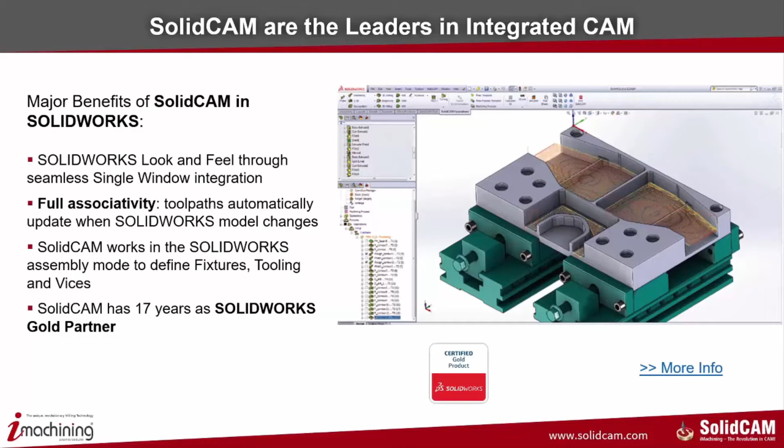We have a complete integrated solution inside SolidWorks. We are a modular system, so we can add the specific modules needed and when needed as well, so you don't have to have all the modules all at once. If you buy a new machine and need extra modules, these can be plugged in afterwards.

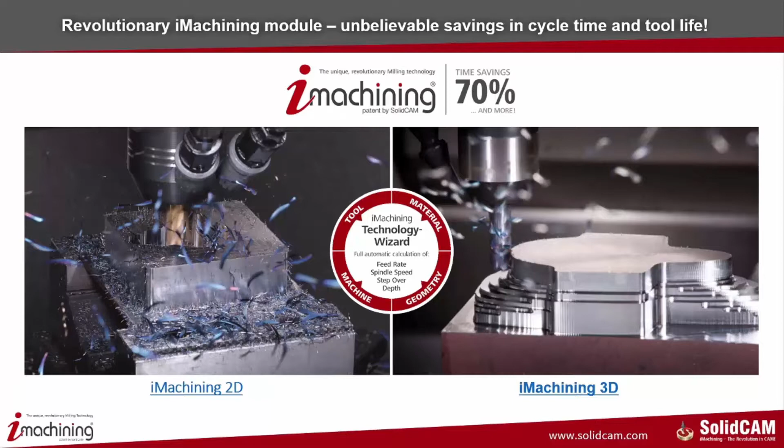Moving on to our iMachining module. So this is our high-speed roughing operation inside SolidCAM with a technology wizard built in as well. So we get increased productivity due to shorter cycle times, up to 70% and more cycle time saving. We dramatically increase the tool life and unmatched hard material machining as well.

We see outstanding performance when using small tools, and we can use iMachining on 4-axis machines, 5-axis machines, mill-turn machines as well. High programming productivity and a very short learning curve. The unique wizard will optimize the feeds and speeds for you, including the depth of cut based on the stock and the tool material, as well as the machine specifications. So this takes the headache out of programming these high-speed roughing operations.

So iMachining comes in 2 stages, all built into the same operation. The first stage of iMachining is to create an intelligent toolpath, so an efficient tangential toolpath which will ensure constant tool load on the machine. And then the second part of iMachining is the technology wizard. This will calculate the cutting conditions for any given machining operation.

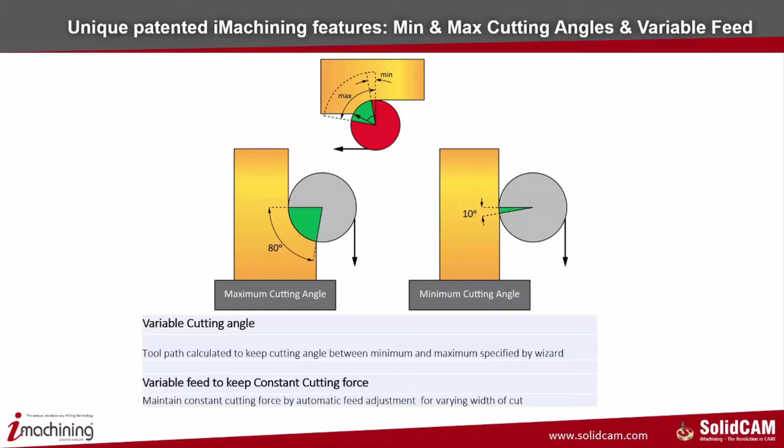So this will calculate things like the speed, the feed, the depth of cut, and also the cutting angles. So we can have variable cutting angles. You can see there from 80 degrees to 10 degrees we can set the maximum and minimum cutting angles based on what we wish to achieve, or we can let the wizard handle those maximum and minimum based on the material parameters that it's been given.

Also, the patented unique features inside iMachining are we have the morphing spirals only in iMachining, as you can see there on the left, so with a varying width of cut. And on the right hand side we have intelligent separation as well for iMachining, so we can separate areas with channels to maximize the spiral area.

You can see there on the left hand side we're machining up to a wall. Now once we're machining up against the wall we're going to be full engagement with the cutter. So what iMachining does is it separates this section out and machines in a sort of lace strategy here against the wall, and creates these 2 channels here to leave 3 final areas for spiraling.

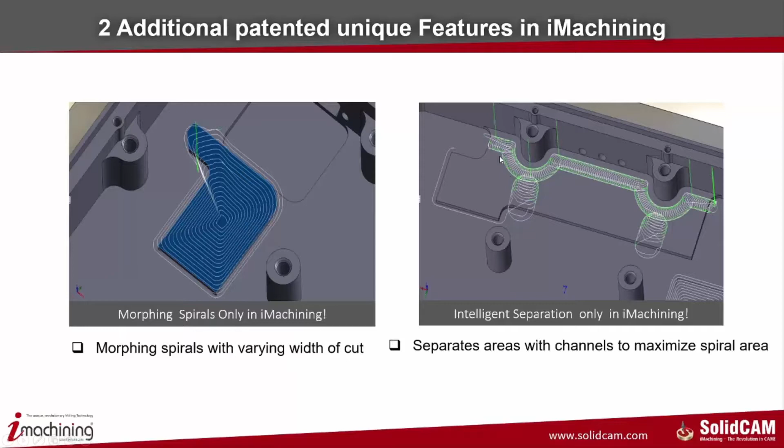So optimal speeds and feeds for iMachining. So the technology wizard will calculate these speeds and feeds for you based on data that we have initially entered. So we would enter the material properties. We obviously select the geometry that we want to machine. We have the tool geometries and we put in the machine parameters.

This will then calculate all of these that we see in red here. So the technology wizard will calculate the depth, the feed rate, the step over and the spindle speed, all synchronized together.

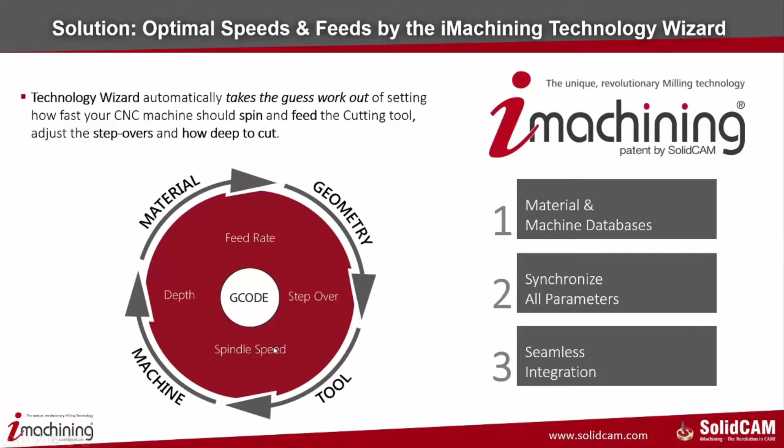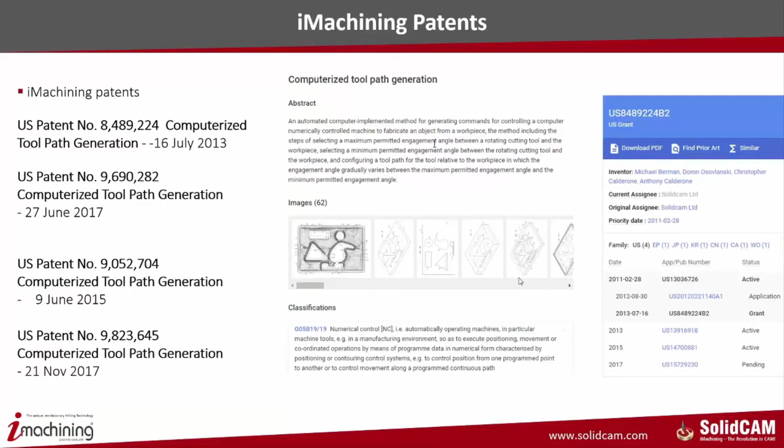And again iMachining will calculate this for us. iMachining is a patented technology. No other system can use our technology. You may see other systems using the spiral or morphing toolpaths, but you won't see any system using a spiral toolpath and also calculating the speeds and feeds and depths of cut using our technology.

So let's have a look at a demonstration of the component that we're actually cutting live on the machine today. So this is the component that we're cutting today live in our seminar. As you can see, we have two operations on this component.

So first of all, operation 1, we start with a blank billet of material, and we are holding this in the Schunk vise in the double pot system, and we're then going to use some iMachining to initially rough out all of this material here, and then we're doing some general machining and finishing on the inner shapes, and then chamfering around the top on operation 1.

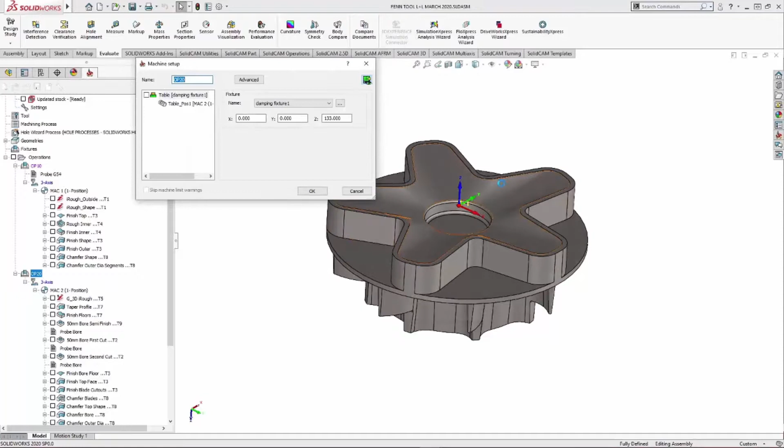Now, operation 2 is where we then turn the component over. We already have this shape machined, and we're now holding it again using the shunt double pot system, but now holding it in the diaphragm that has the shape cut into it. So this will hold the component down while we machine the second operation.

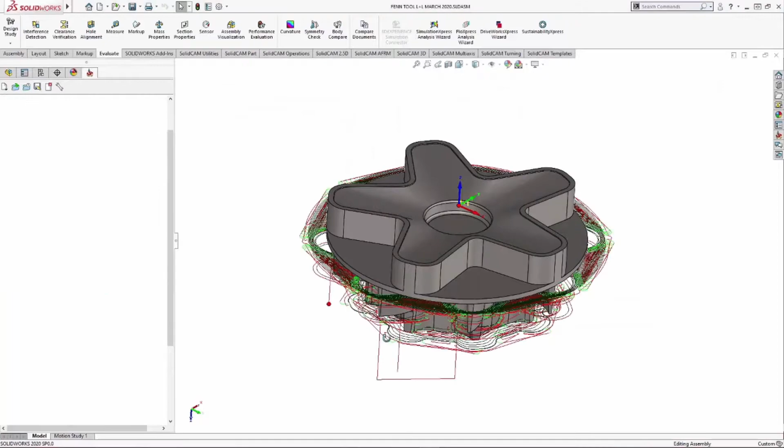So if you have a look at the iMachining on the second operation here, you can see where I'm machining out the center and all the way around this outside shape. Now these outside walls are actually tapered, so as you can see here, iMachining is actually doing a full cut, and then it comes back up the wall to produce a cusp on there ready for finishing, and that is done in the technology section.

I have applied rest roughing and told it to create a maximum scallop of 0.5 after it's finished its initial roughing of all the meat. Now just moving on to the technology wizard here, this is where we are looking for the ACP. Now we're at 1.97, you can see it's nice and green in there, so we have a nice green chart telling us that this is optimal cutting conditions. We are close to a whole number there, so we will get those optimal cutting conditions.

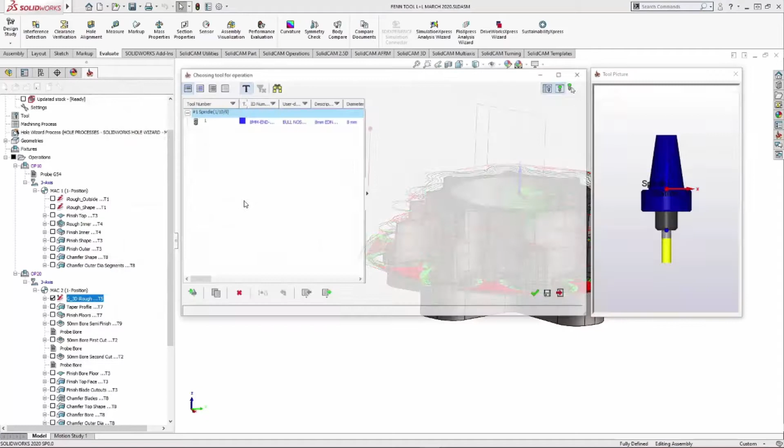If I go to the tool, you can see we're using one of Fenn's bullnose tools here. So this is a 8mm tool with a 0.15 rad on the corner. It is a 4-fluted end mill, and it has a 37-degree helix on the flutes. If I was to change the flutes, for instance, let's say this only had 3 flutes.

If we go back to our iMachining, you'll see the technology wizard has changed. The speeds and feeds here and the step over have changed, and now we're into the orange section. We're at 1.48 ACP. This means that we're likely to get vibration from this component now. The tool is not suited to cutting under those conditions.

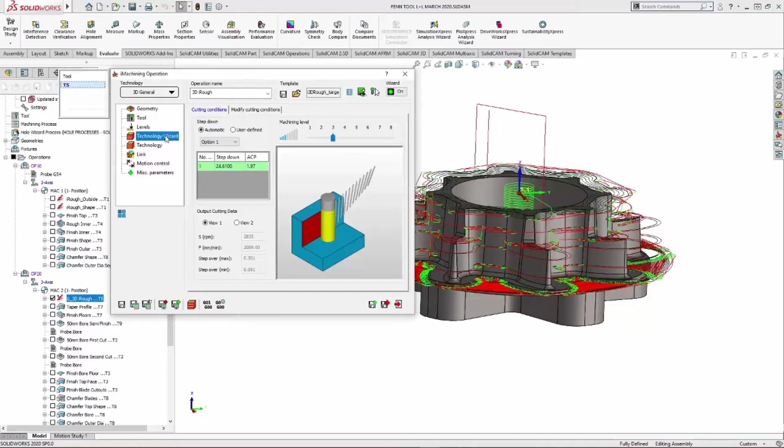So I'm going to go back and I'm going to alter my flutes back to it being a 4-fluted end mill. That was just to show you there that the technology wizard is actually using the data that we've input to calculate its operations and calculate its speeds and feeds.

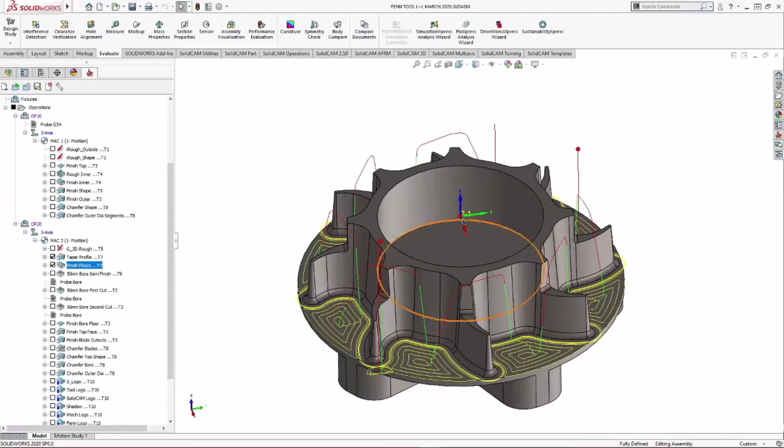Let's have a look at another operation here, these 2 operations here. Now these are finishing the walls and finishing the floors. Now this is a 3-axis machine we're running on, the Romi D1000. So we can't tilt, we're not using 5-axis in this particular instance. So what we've actually got is a taper tool from Fenn.

So if we have a look at this tool here, you can see we actually have a taper tool, corner radius on there of 1.5, taper angle of 4 degrees. Now the tool can actually cut on the bottom as well.

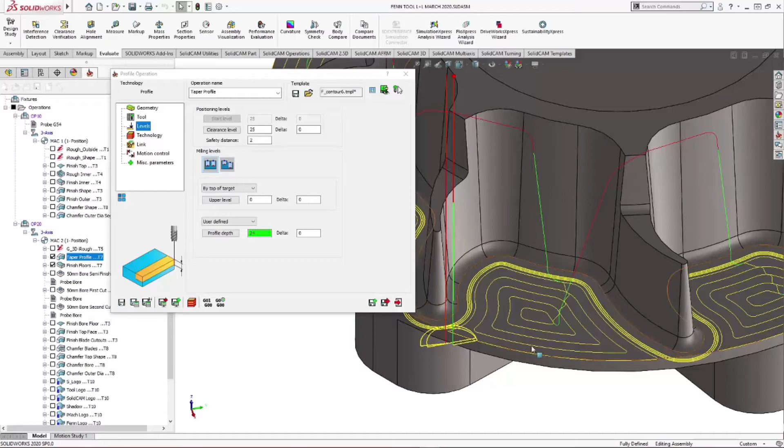So what we've done here is this first operation is we have machined around the walls, and then the second operation we've machined the floors, and we've got the rad on the tool as well that is the same as the radius on the bottom of this component. So as we go around and machine that taper and then machine the floor, we will blend the radius into it, leaving no witness marks because we're using the same tool for both operations.

So I'm just going to show you a simulation of the iMachining in SolidVerify. So this is iMachining simulation here. You can see the tool starts from the outside and we get the nice morphing toolpath as we move in between those blades. We've got a constant engagement there, and we are varying the feed rate. You can see the feed rate is constantly changing.

If I expand this a little bit more, you'll see that the cutting angle is also varying. So the cutting angle and contact points are changing at the same rate. They are synchronized with the feed rate. So the lower the cutting angle, the faster the feed rate, and the greater the cutting angle, the slower the feed rate is.

If we just move on and show you the taper tool working in simulation as well. So this is what the iMachining has left behind, and if we just slow this down, you'll see the taper tool come in. It takes a couple of roughing cuts at it, so we're stepping inwards towards that face there. It has no problems cutting on the floor. It's designed to cut with the bottom of that tool.

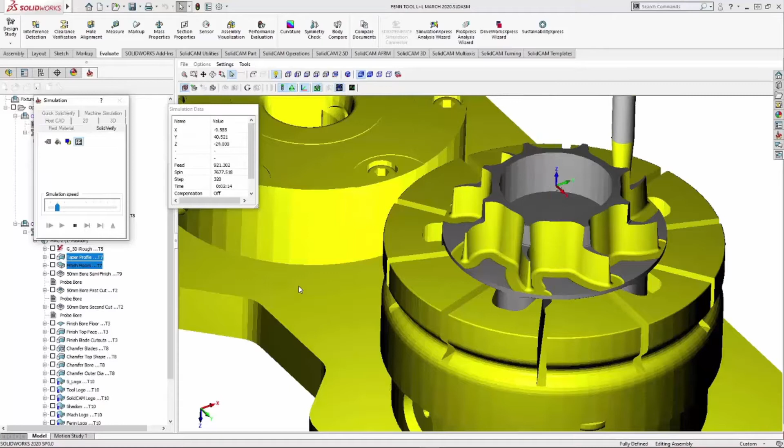So as we go around we leave the radius behind with the radius that's on the tool itself. So one last finishing pass there as we go around, and then we will cut the floors with that same tool. So again, having a nice blend on the floor in a nice concentric pattern, creating a good finish on the floor, as well as maintaining that blend and leaving no cusps behind.

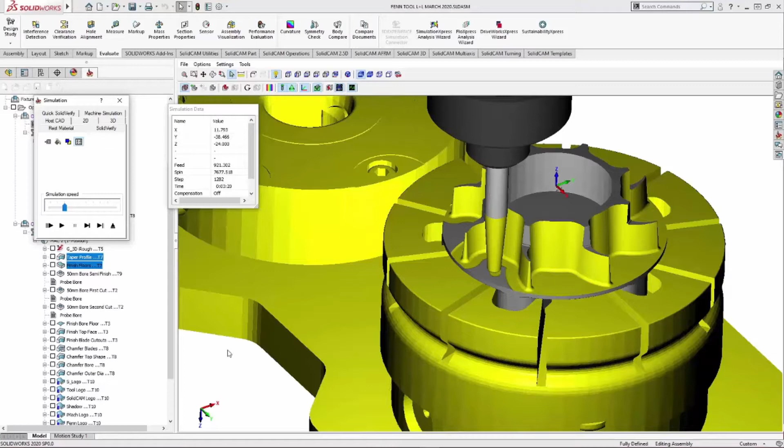So let's have a look at this cutting live on the machine tool. So that was the presentation there on iMachining. You can see there the machine's running. The material we're cutting is EN24T. We've got a few questions coming in here as well.

I've got a question of my own first. Did you order the bacon sandwiches for everybody this morning, Ian? Oh, I forgot, sorry. Yeah, you had one job, Ian, one job.

Yeah, so some of the questions coming in. 70% time saving, what is this compared to?

So compared to traditional roughing strategies, where you would be doing a small step down with a larger step over, maybe still running at quite high feed rates, we're using the full flute length of the tool. So compared to traditional roughing strategies, the time savings are one element of iMachining, but also using all of the carbide, using everything that you've paid for, less pressure on the machine, less pressure on the spindles. There's all sorts of different benefits there as well. So I hope that answers that question.

Okay, there's another question here. Does the material type have an effect on the benefits that you can gain with iMachining? No, we can use iMachining with any material type. So we can use it on softer materials like aluminium. We're using a mid-grade or quite hard steel, really, EN24T. We can use it on titanium as well. You still get the same time savings and benefits that you would from any other material.

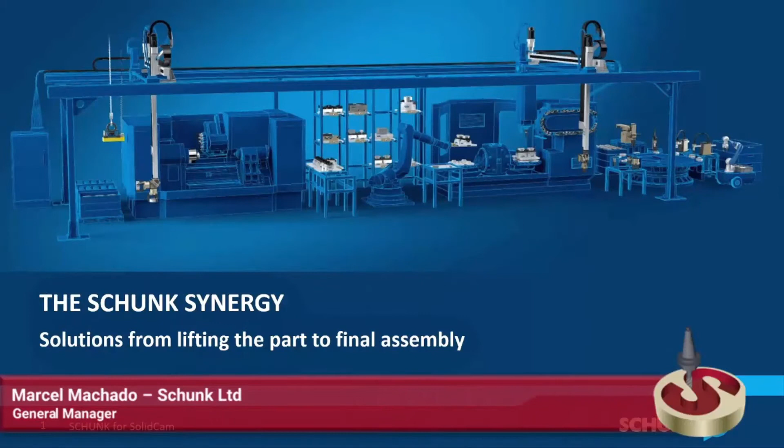Today we will be talking about the work holding solution inside the machine. For this demonstration, SolidCAM are using a VERO-S, our zero-point system, in combination with an SPM fixture, a membrane-like solution. The SPM always requires a VERO-S to operate, so we'll briefly go through the main points. For those not familiar with zero-point, it comprises one or multiple plates fixed to the machine bed and a pin attached directly to the part or to a vise or to any other work holding equipment.

Our zero-point solution is pneumatically activated, so all you need is a 6-bar air feed to operate it. Virtually all CNC machines have an air feed, making the system a plug-and-play application. The locking is done using springs. That means there's no need to keep the system energized during machining, so there's no need for air through the table. The operator can plug an air pipe, drop the part, pull the pipe, and setup is finished. The locking capacity is incredibly generous. If it fits inside your machine, it will hold it. Repeatability is 3 microns. Set it and forget it. Once you set the system in place, there's no need to readjust the setup.

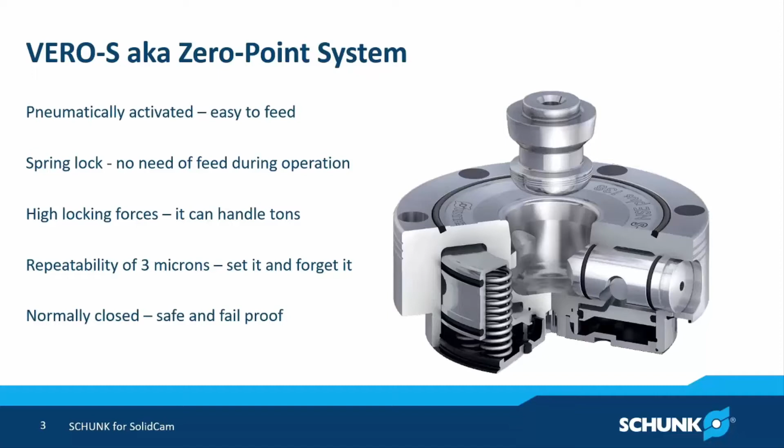It's fail-proof. The fact that the system can run without being energized also means that if you have a power cut or any other machine interruption, the work holding is not going anywhere. Schunk system is unique regarding the sliding tolerances. That means that you can have wide angle or off-center parts and the locking will happen anyway. Particularly important when you cannot see or if you're handling very large items that will swing on the crane.

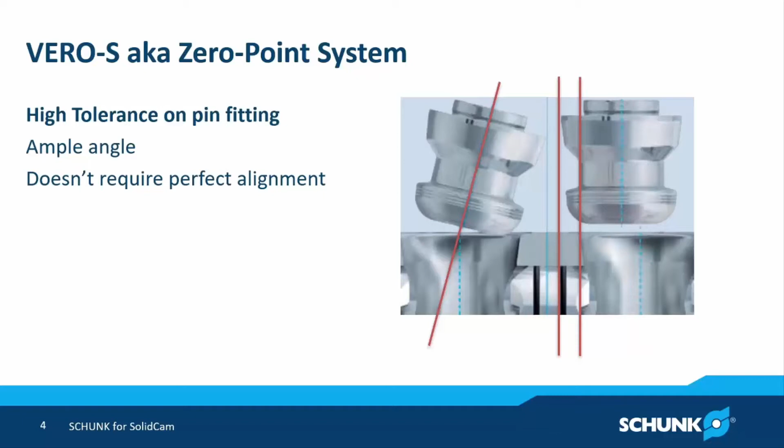So moving on to the SPM, the flexible diaphragm system. It's a highly customizable fixture. Think of this as a DIY custom fixture with amazing value for money. Here you can see the part on the top, which can be of any profile machinable, the SPM itself, and the VERO-S base on the bottom.

So what is it capable of? The depth of grip can go from 3 to 20 millimeters, holding force is 50 kilonewton, and the work diameter goes from 36 to 125 millimeters. The stroke is 0.5 millimeter, and that's what you use to set up the clamping force. The bigger the gap you leave between a machine profile and the actual part profile, the lower the force. The tighter the gap, the stronger the force. It's self-centering. It can be remachined to suit other parts, much like any soft jaw.

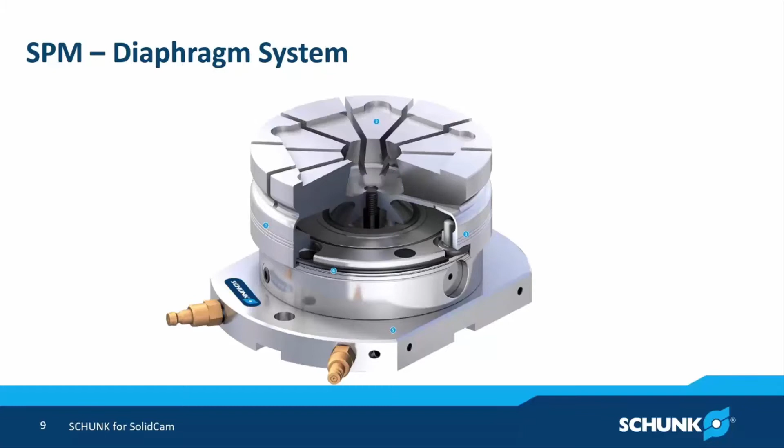Setting up, all you need is a VERO-S pin going through the bottom. You machine the profile as required, and it goes on top of the VERO-S, covering completely, preventing any swarf ingress. So it's important to highlight that you don't need one of these per item. You can combine different profiles within the same item. So what we try to demonstrate here is that you could use one SPM for 2 different ops, for example.

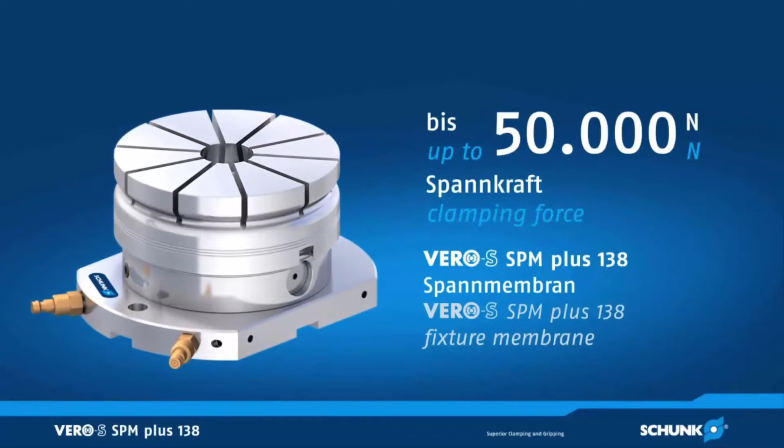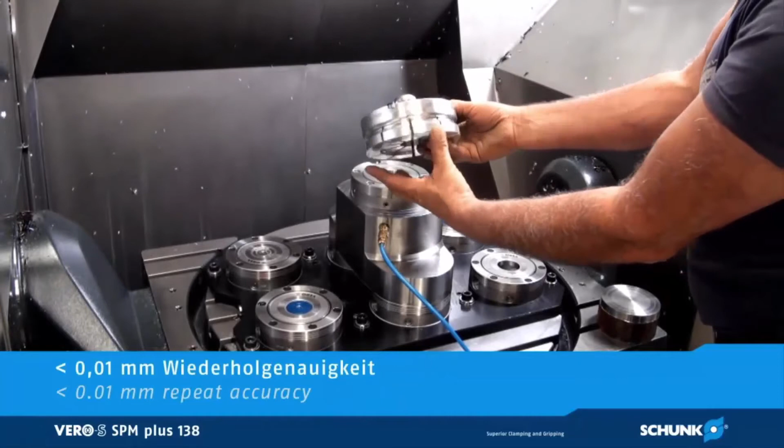So here you can see the 2 air pipes in and out, 50 kilonewton of clamping force. So air goes in, zero point unlocks. You can see the SPM has already been cut to shape. There's a pin attached to the bottom and a centering pin on the edge. It goes in. Once you pull the air off, it locks and pulls the membrane down. That's your locking action.

So now it has been released. Part goes in, air comes out, and is locked. Simple as that. And now we can see a very aggressive cutting strategy here, and the fixture remains rock solid. So in summary, it's a very flexible application which can be at the same time gentle to a machined surface and extremely strong holding the part with any variety of profiles.

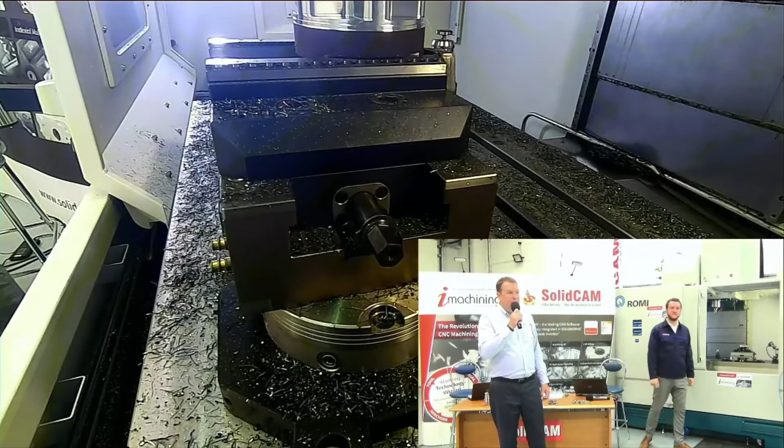What we're going to do now, Ben's going to take the part out of the machine and give you a quick look at the camera. Just show it to the... there you go. So that's the part after op 1. What he's going to do now is change the holding system. So what he's going to do is take off the vise, which is currently held in the zero-point system as we described earlier. So as he attaches a pneumatic device, it releases the clamps, so that enables Ben to be able to take the vise off.

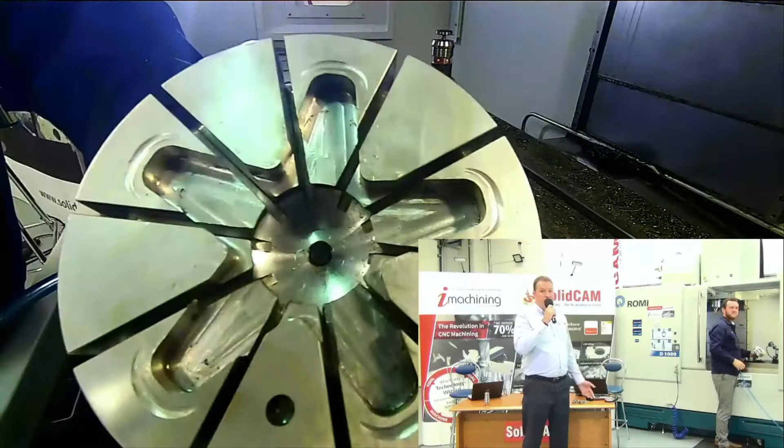The pneumatics control the springs, so what Ben's going to do now is replace this with a diaphragm system. So it just covers up one of the pots because we're not using it, and there you can see the diaphragm with the shape cut in it. So that shape is the same as the end of op 1, so it's the finished size. This is pre-cut

for the second operation. So Ben's now going to put that into the pot when he's cleaned it up. So once this goes in, Ben will release the pneumatics, and once he's released it, this will then clamp down on the system.

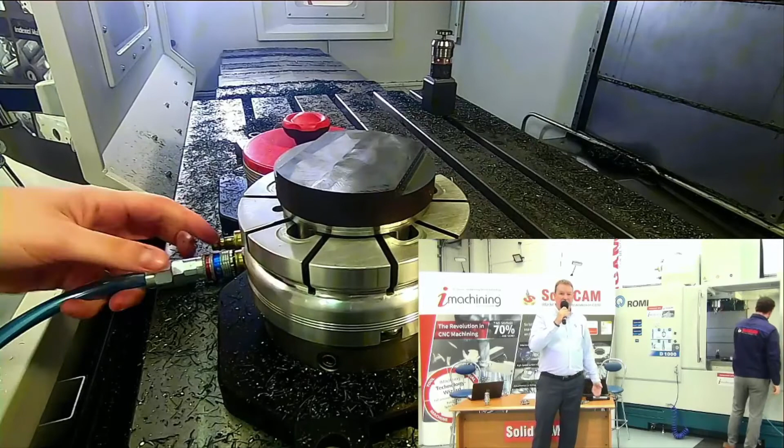There you go, it's just cleaning it up. So Ben's introduced the part into it, so as he takes it off, you may just be able to see the diaphragm close down, and what he's doing is applying it to the second hose fitting, and that exerts a force behind the springs as well. So now we're ready to start op 2.

So Ben's taking off his working clothes, because obviously he's just been working for a living for a few moments then, and we're ready to go on op 2. So I'll hand over to Ben.

Yeah, thanks Ian. So as you saw, it's the quick change system, just 0 point setting as well. So the diaphragm is basically like a collet. Once you put the air and load the air behind the springs, it will pull the collet down and squash into the part. We've obviously forced, like you saw in Marcel's presentation there. He explained that as it sort of pulls it down.

And now we're into iMachining again. So this is 3D iMachining this time. There's no difference in the application of 2D iMachining to 3D iMachining. 3D iMachining, in terms of the software, just means that you can tell it to cut a whole part rather than a prismatic shape. So we're cutting a 3D shape here because the walls are going to have tapers.

So we're cutting the full depth of cut first of all, and then it will go around and it will then recut at a 0.5 step down, just to generate the cusps up the wall ready for finishing. So you can see there it's got a full cut on now as it's going around the component.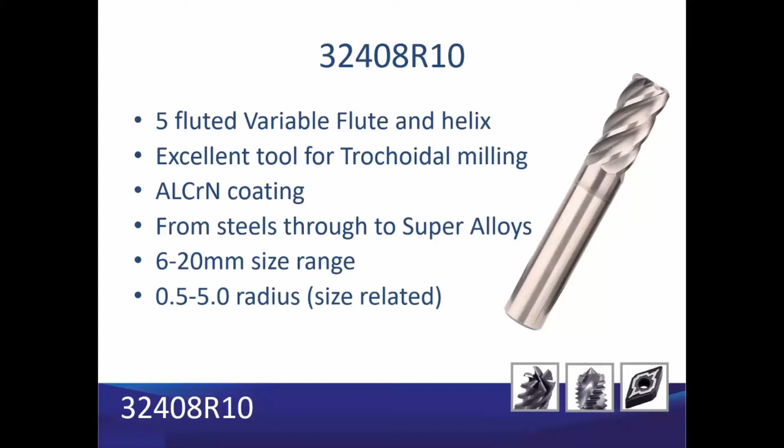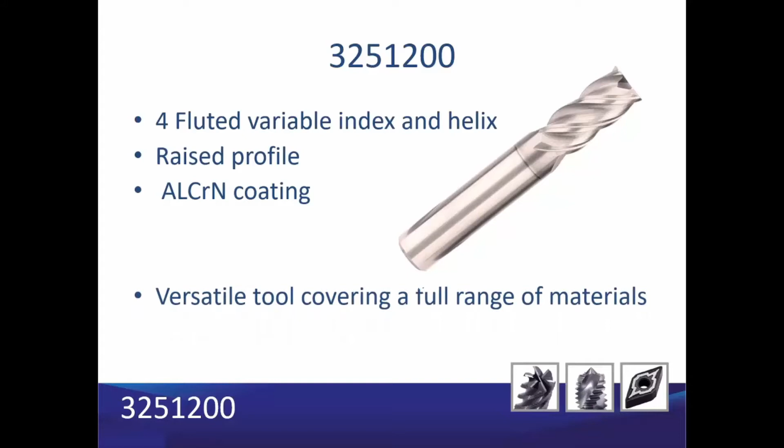The 3251200 is our 12mm variable indexed helix tool. This is used for ramping to do the internal part of the bore and then opening out to the sides. It has a raised profile and it has an aluminium chrome nitride coating. This makes it a really versatile tool for covering a full range of materials.

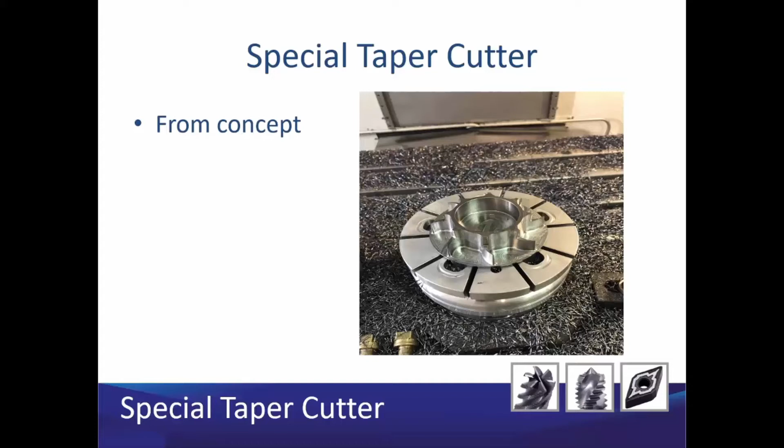When we first started discussing this project, we wanted to show the versatility of the software, but also the versatility of Fenn being able to produce something slightly different tooling wise. So we decided on a special tapered cutter. So the tool was designed by our R&D department, a drawing produced. The drawing would normally be sent on to the customer then to sign, just to say he's okay with the dimensions, and then the tool would be made.

It would then go to our manufacturing facility, and we are one of the leading UK manufacturers of solid carbide milling cutters. The UK manufacturing facility is based in Braintree in Essex, and that was opened in the year 2000. We are ISO 9001 certified. We have an intensive R&D program which is used to develop new tooling.

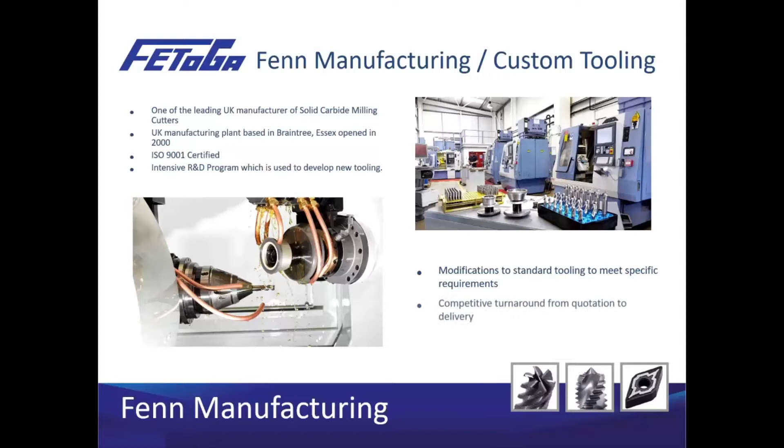Modifications to standard tools to meet specific requirements from customers. This can be going from necking to radiuses or any slight modifications on tools. This can be done. And we have a competitive turnaround from quotation to delivery. And here we have the finished tool.

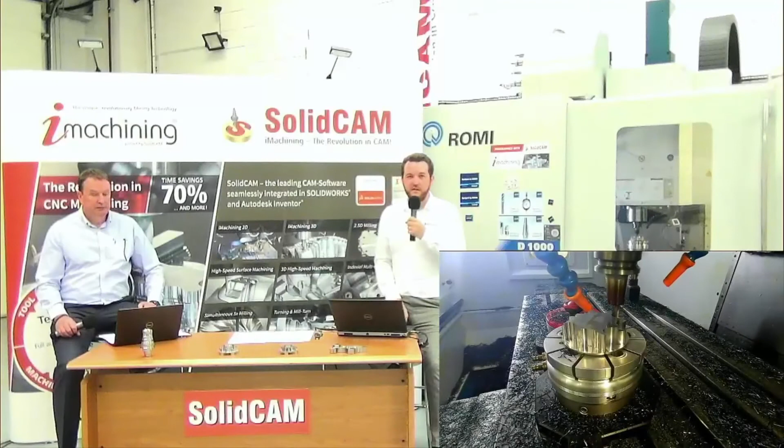Thanks Mike for that presentation. As I said before, we've worked quite closely with Fenn Tooling on this seminar as well. I mean, not too close, we're still social distancing.

So we have got another question in there. What spindle speed, feed rate, step over and depth of cut are you using? So on this particular bit of iMachining, 3D iMachining here, we've got a 12mm end mill. The step over is just less than 1mm, so just short of 10% step over. The spindle speed is 4,800 and the feed rate is 4,600 millimeters a minute. The depth of cut is 24.6 millimeters, so nearly 25mm depth of cut. We're using that full flute length on there.

A question here as well, what tool radius would you recommend as a maximum for iMachining? As I'm aware you don't support ball nose cutters. So we would not recommend ball nose cutters obviously for roughing in any instance, especially not for iMachining. You want a minimum radius on there. It's really just to stop the corner of the cutter chipping whenever you do any roughing strategy, really.

On this particular tool, there is a 0.15 chamfer on the end of the end mill. And on the first tool that you saw, the 8mm on the 2D iMachining, that was a 1mm rad on that tool as well. So you can have a radius on the bottom, but I wouldn't go to the extremes of nearly a ball nose cutter.

So I'm just going to hand over to Ian now. Maybe he's going to tell us a little bit more about some of the other products in SolidCAM. Maybe he can talk about HSM.

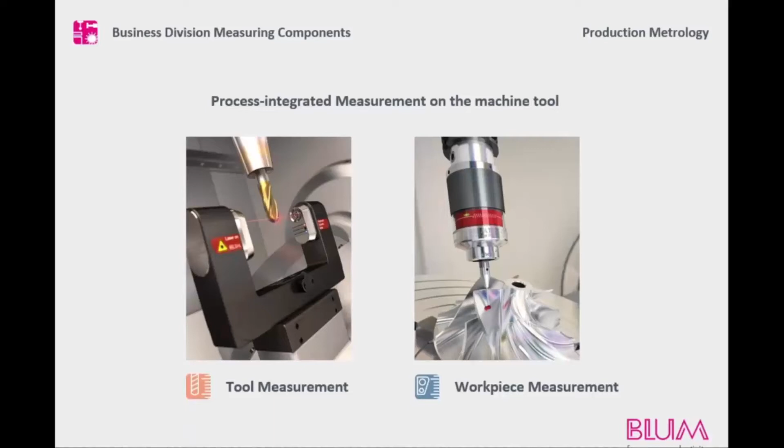Blum was started over 50 years ago by Gunter Blum and is still family owned to this day. We now have over 600 employees worldwide and a UK subsidiary set up in the year 2000. We have a dedicated team of engineers in the UK who are experts in retrofitting probes to CNC machine tools and will fully support the installation with training and are fully contactable once the installation has been completed. The ethos of Blum is to ensure that every single part that the CNC produces is a good part. We achieve this by measuring both the cutting tool and the workpiece inside the machine tool. This ensures minimal downtime and maximum productivity of the machine tool.

You will be able to see our touch probes in action today, but I wanted to let you know about our new LC50 Digilog laser system. This is the next generation of laser measuring technology and uses a digital system to measure tool breakage and also an analog scanning capability which provides thousands of data parameters on the state of the cutting tool.

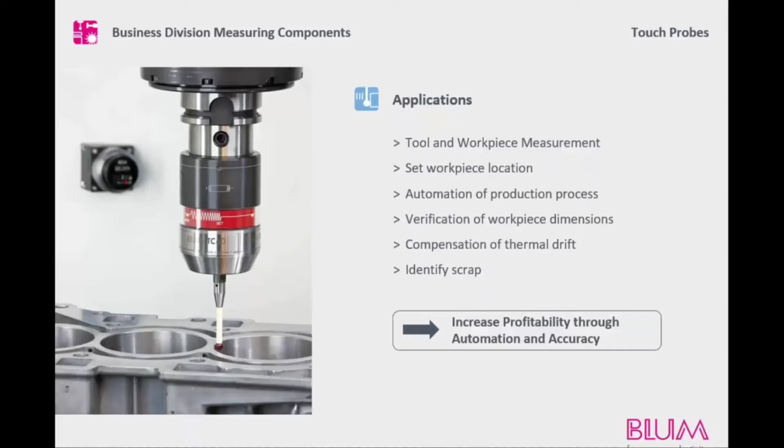Our high-quality touch probes are a very cost-effective way of ensuring that the measurement process of the workpiece and the cutting tool is automated into the machine program. This ensures that every single part that is being produced is good every time, increasing productivity. And you can see by some of the features and applications here, we're all about ensuring that every single machine is working at maximum productivity, increasing automation and ensuring minimal operator involvement.

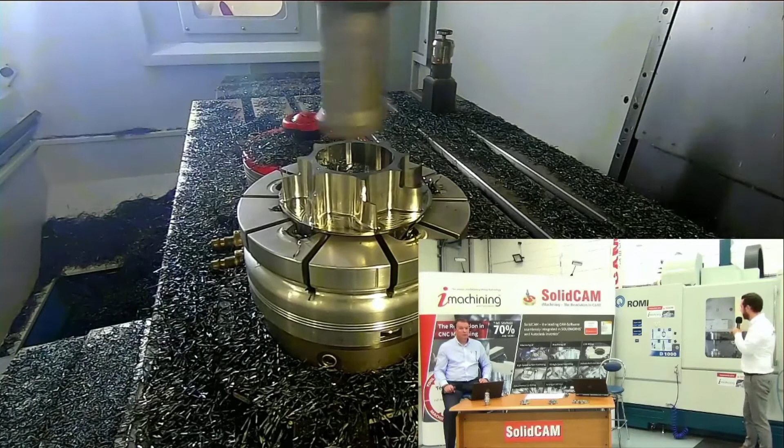So the rough boring bar is going to come in first. The roughing boring bar is just a preset boring bar. It's not got automation on it or anything like that. It's just going to come in and take a skim out of there and leave 0.3 inside that bore, ready for a semi-finish cut.

Now once that rough boring's happened there, you can see it's gone away now. It's going to go for the probe. So we're going to pick up the probe when it's come round in the carousel. These boring bars are big boring bars, so they've got dedicated pots. So the probe's going to come in now.

It's going to probe the bore, and you'll not be able to see it on camera, but what we'll see on screen is it will tell me the size that it's probed. Once it's sized, I don't need to do anything with that information. I've put a stop in again just so I can talk through it. So it says here the bore size is 49.8, so it's left 0.2 on inside that bore.

Now that's fed that information back to the automatic boring bar. So you're going to see a different boring bar come in now. So this is the automatic boring bar, and it's going to have adjusted itself and set itself to within 0.05 of the bore, ready to do a semi-finished cut. Now again, it's just changed to an empty pot because the boring bar is so large. We've got a dedicated pot.

So you can see here the big white bit there is the sensor for this boring bar. So you can see it's taken a rough cut. We've moved out, and we're going to go pick the probe up again, and we're going to probe this bore and see what size it comes out at this time. So that was the semi-finished cut. It should be within 0.05 of the finished size. The size we're aiming for is 50mm. It's going to be the finished size of this bore.

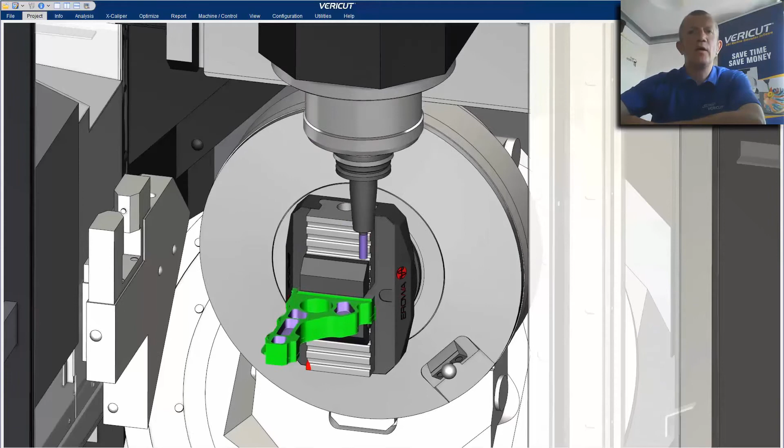Hi, my name's Tim Mitchell from CG Tech. This is going to be a short video showing you the features and benefits of Vericut software. Vericut is the world-leading software package for verification, optimization and simulation. Vericut simulates real-time NC data and uses a digital twin to prevent costly crashes on your actual machine.

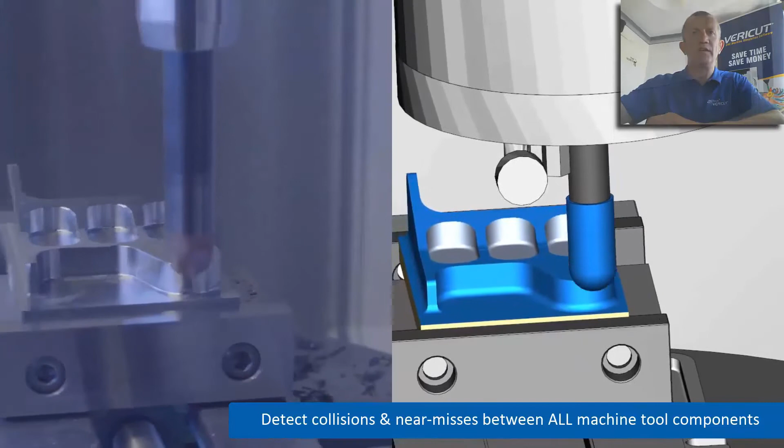Due to the modular design of Vericut, customers can choose the capabilities that they need specific to their requirements. The verification module reads in the same post-processed G-code and will highlight any issues prior to the NC code getting sent to the machine. Machine simulation enables full realistic 3D simulations using the true digital twin with the most accurate results from any other package.

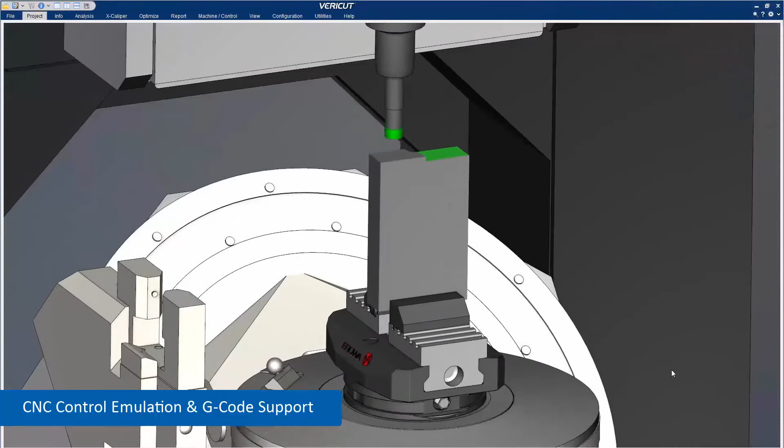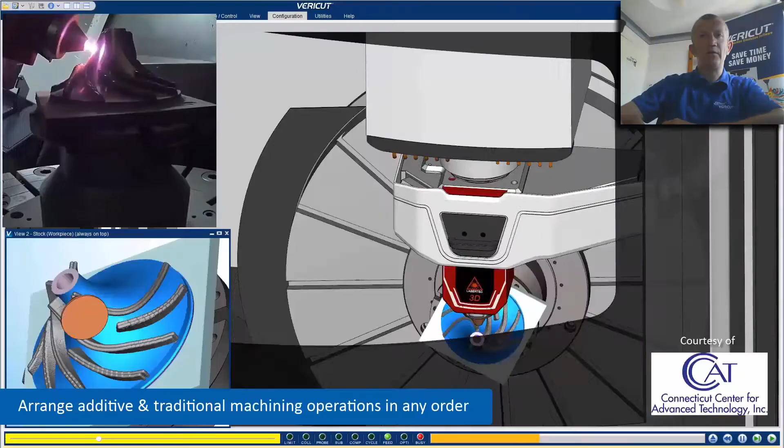By using the multi-axis module, customers can check any simultaneous axes, whether it be milling, drilling, turning, or any other functionality that they need to simulate. Additive: this enables our customers to use Vericut to simulate and check the processes when using hybrid technology.

Force optimization can significantly reduce machining times and improve the process by protecting the spindle and your cutting tools. Charts can assist in the cutting process by identifying areas of concern or areas for improvement. This can be used on new or old programs to ensure efficient and safe running throughout.

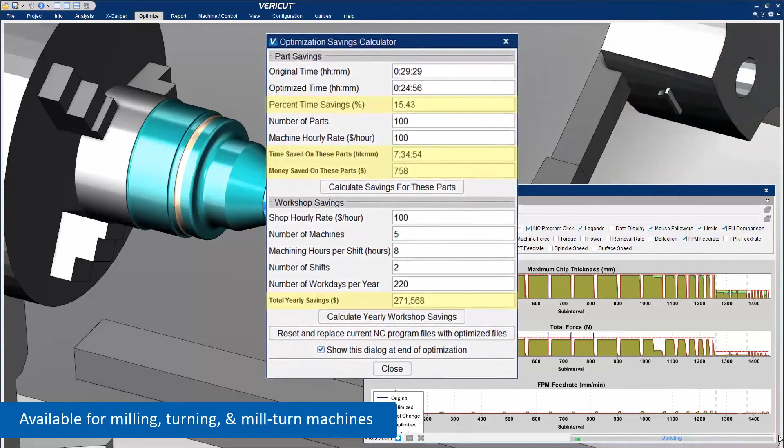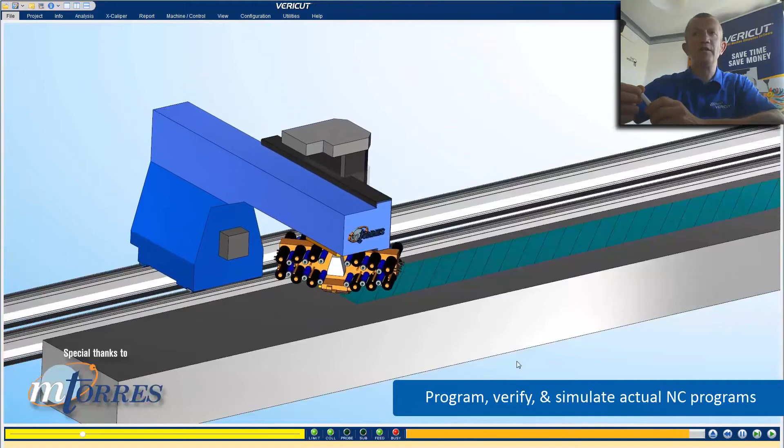Composite applications: Vericut can assist with the programming, verification and simulation of the automatic fibre placement processes. VCP is the programming package available and VCS is the simulation package available.

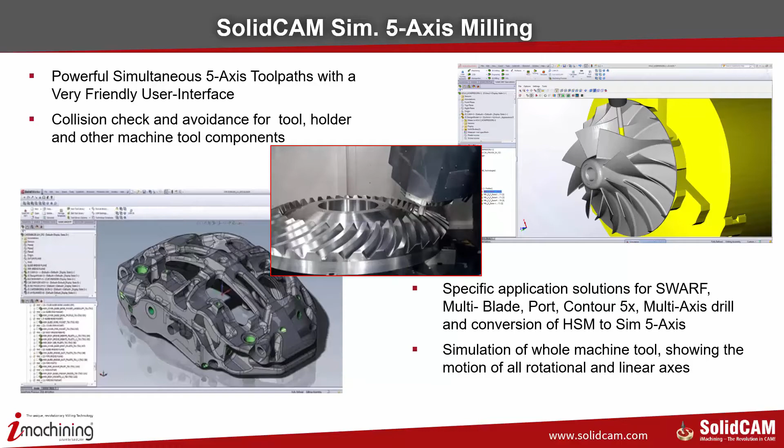We've got multi-axis drilling, conversion of HSM to simultaneous 5-axis. There's also SWARF machining as well. So these are all dedicated to those specific areas, making it quite easy to produce programs and toolpath for these types of parts. And we've got simulation of the whole machine tool as well in machine simulation, showing the motion of all the rotary and linear axes.

We've got 3 and 5-axis mirror machining capabilities as well, so we can reverse the toolpath to maintain the cutting direction. That's done automatically when we mirror a toolpath. Obviously the ease and speed of programming for handed parts, so being able to program a left-handed part and then just easily mirror the whole program across to a right-handed part makes it quite easy.

We can mirror using the same datum, so we can keep the datum the same and have one datum for two components. We can mirror about a new datum, so we can have a separate datum for each individual component, and we can add operations to the end, so you can complete one part and then machine complete the second part, or we can optimize it inside the operations as well, so whilst we've got one tool out, we can do everything on both components with that tool, then move on to the next tool.

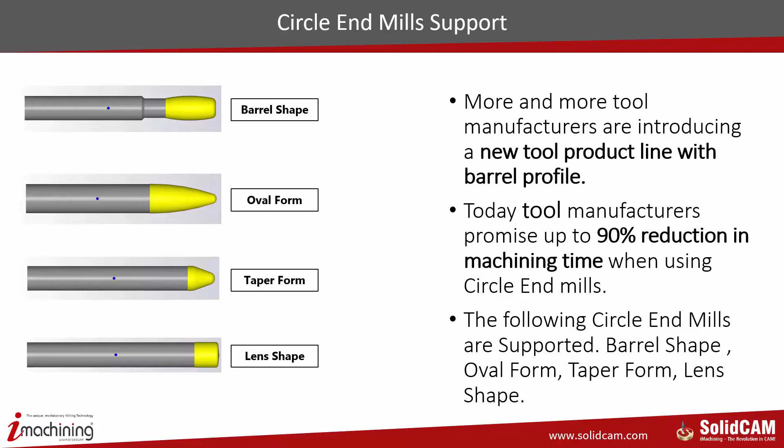Some of the barrel milling supportive tools in SolidCAM, we see there we've got barrel shape, oval form, taper form, and the lens shape as well. So we can do 3 and 5 axis toolpaths with barrel cutters inside SolidCAM. So tool manufacturers promise up to a 90% reduction in machining time when using barrel milling tools. And you can see the benefits here, and you can see where that reduction comes from.

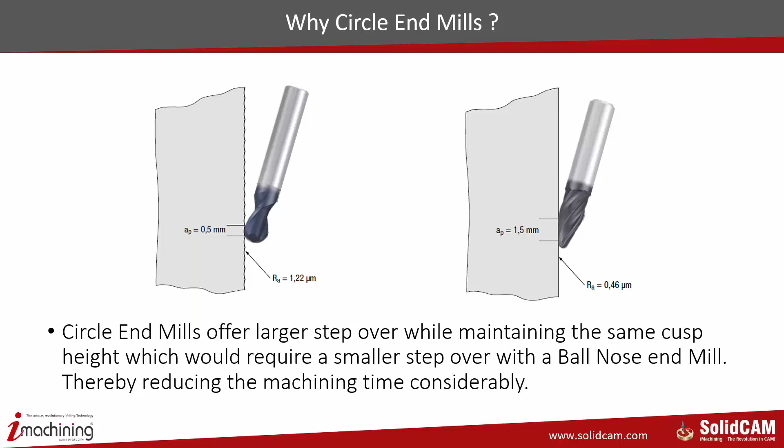Circle end mills offer a larger step over while maintaining the same cusp height, so you require a smaller step over with a ball nose end mill to produce that same surface finish or same cusp height. You can see there on the left hand side we've got a ball nose cutter 0.5 contact point there, and on the right hand side we've got a barrel mill with a 1.5, and the surface finish is actually better. So if you wanted the same surface finish as you've got there on the left, you could even increase that to 2mm, 2.5mm, step down and create the same surface finish.

Some other benefits to barrel milling as well. Obviously we've got the low cusp height, but we've got balanced machine inaccuracies as well, smooth transition between the cuts, and low dynamic disturbance due to shorter tools. So because we can tip over to use the barrel tool, it can be a lot shorter than a standard end mill.

You can see here why circle end mills as well, some more reasons. So tools with barrel section can be tilted, so we can reach in further. You can see that there. We've got collision when the tool is vertically upright, either an end mill or a barrel mill, but as soon as we tip the barrel mill over and we're still using that same radius, we can get down a lot further.

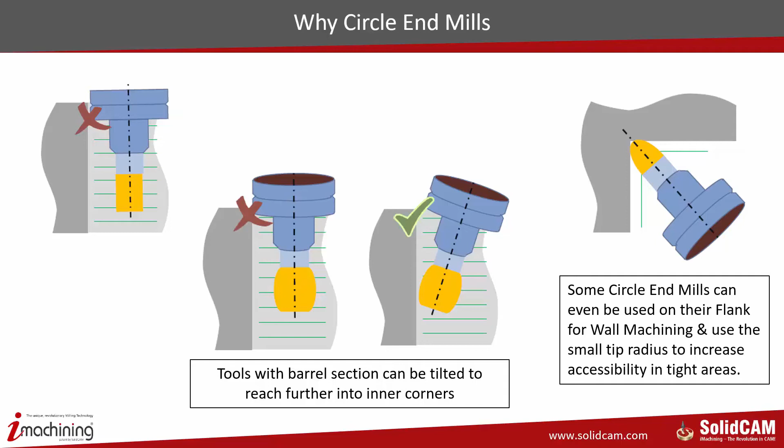And also some circle end mills can be used on their flank for wall machining, so we may have a radius on the bottom of the tool and we can actually come up the wall, or we can create small radiuses in the bottom using the same tool, so we can minimize any blend issues that we may have.

And in terms of 3-axis barrel milling, you can see there on the left hand side we've got a lens tool which is of barrel form. That's a 10 diameter tool with a 20mm radius on the bottom, and a 2mm corner rad. So actually this was running at a 1mm step over. We did run this at the last seminar.

This was one of the benefits we showed of barrel milling against a 10mm ball nose to create the same surface finish. We had to run that at 0.1mm step over. So you can see there that that's 90% cycle time saving just by adjusting the step over. So that's with the same speeds and feeds and everything consistent, just by changing step over from 0.1 to 1mm and using the same diameter tool, we've actually achieved 90% cycle time saving.

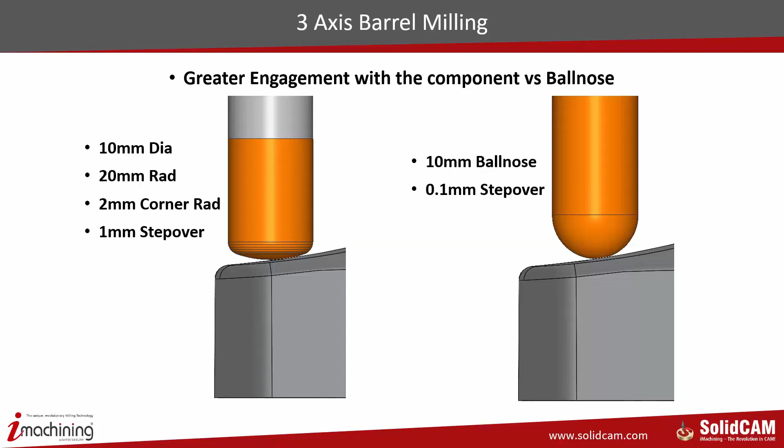And in terms of 5-axis, we can see here again the comparison. On the left hand side here we have a 6 diameter barrel with a 95mm rad and a 1mm corner radius on the bottom. Now this is running at 3mm step over to create the same surface finish as a 12mm ball nose would be at a 0.2mm step over.

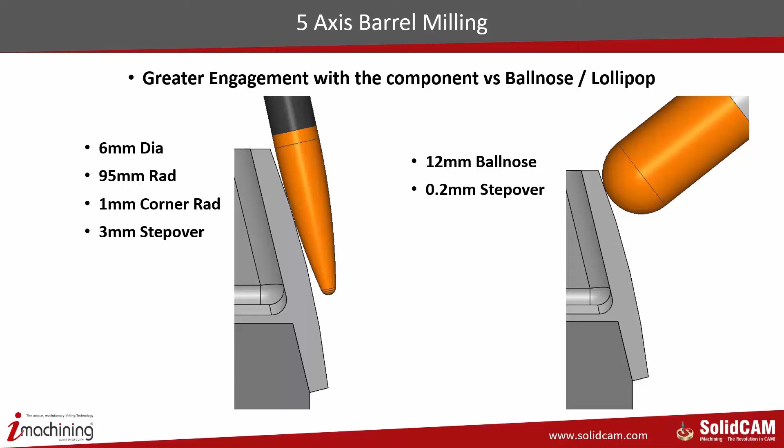You can see also as well on the ball nose we've had to tip that ball nose over quite a long way to achieve the contact, whereas the barrel mill is nearly upright, which means we've got less chance of collision as the table banks over. So we'll have a little look at this in the software, then a little demonstration in the software, and then we'll have a look at some other features inside SolidCAM.

So we can see here, this is the part being demonstrated. We've got some barrel milling on here inside this little deep pocket. This is that 6 diameter tool that you saw with the 95mm rad. You can see it's kicked over to the same angle as that side wall face there as we go down the face, and then we start to pick out the radius at the bottom.

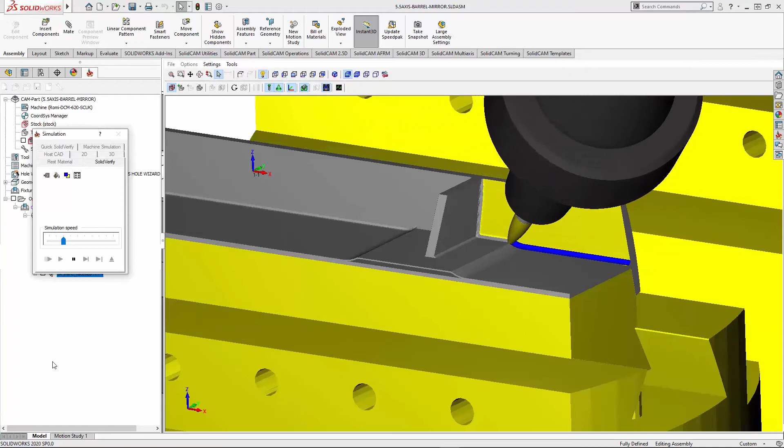We can see this in SolidVerify here. You can see it machining those sidewalls, and then we pick out the radius at the bottom, and we also scan up the radius in the corner, and then we come over and machine that wall separately.

Now this section here is showing mirror machining, so you can see there I've highlighted all of the operations in there. I'm going to select to mirror about a plane that's been created in the middle of those two parts. We're creating new operations in position, and we're doing this on a new Mac position as well, so a new datum. You can see that it's easily mirrored all of that toolpath,

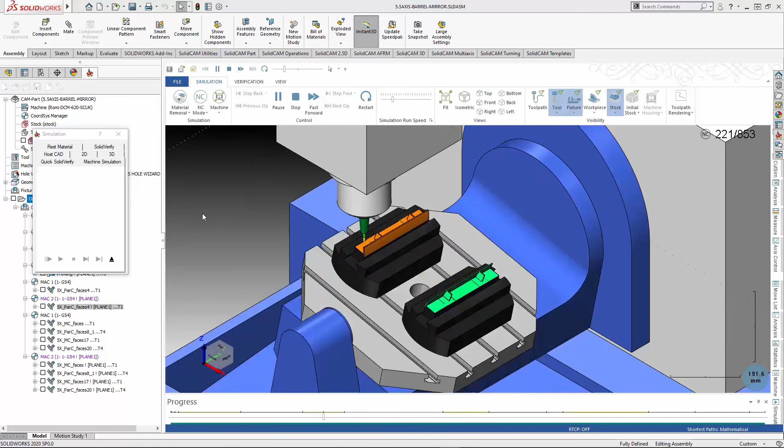and if we see that in full machine simulation, it's mirrored the 3-axis toolpath as well as mirroring the 5-axis toolpath with that barrel cutter. You can see it machining one component, then the other component, and then changing tools and coming back and machining the next component. So that was 5-axis.

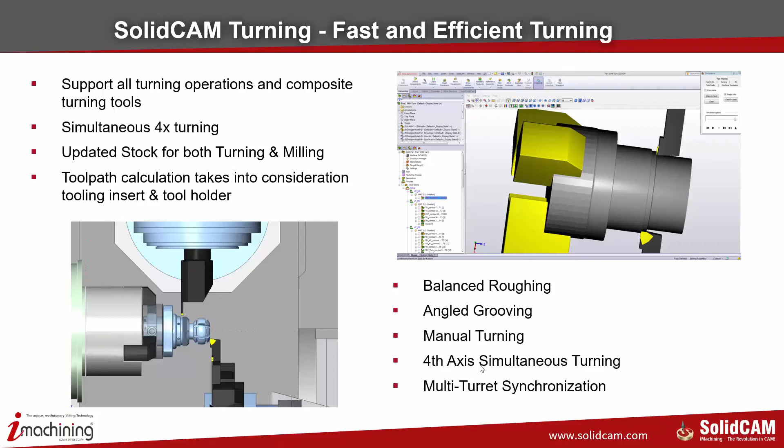We're going to have a look at advanced mill turn and Swiss type inside SolidCAM now as well. So we can see here we support all turning operations and composite turning tools. We do simultaneous 4-axis turning as well, updated stock for both turning and milling. And the toolpath calculations also take into account the tool and insert and tool holder. We've got things like balanced roughing, angled grooving, manual turning, 4-axis simultaneous turning, multi-turret synchronization.

We offer MCOs, so we can insert control operations while manufacturing a part, so we can insert custom features and functions, and mill turn parts also support iMachining 2D and 3D, so we can still do iMachining in a mill turn type environment.

So regarding the Swiss type support, we've got support for an unlimited number of axes and channels inside a mill turn post processor. You can see there on the left hand side an example of a Citizen Swiss type machine with 7 axes, and on the right hand side we've got a Star SR-38 machine which has 10 axes

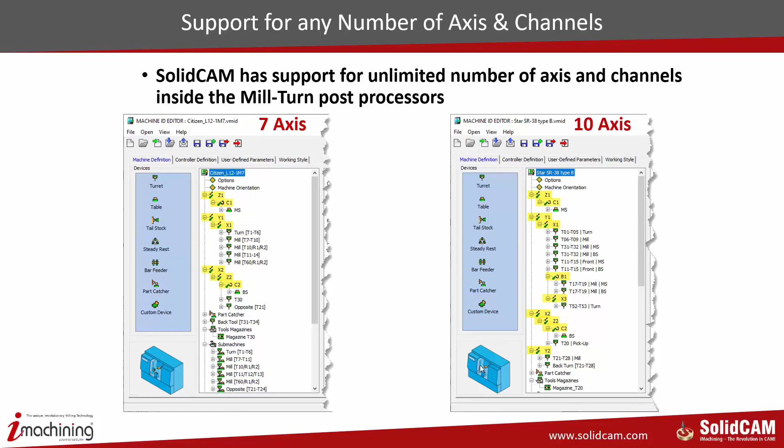on there. The channels can be split into either turret or by spindle, and again we can have any number of channels. We've got full support there for our channel synchronization, so you've got full control over that, and we can even import and export different channel synchronization setups.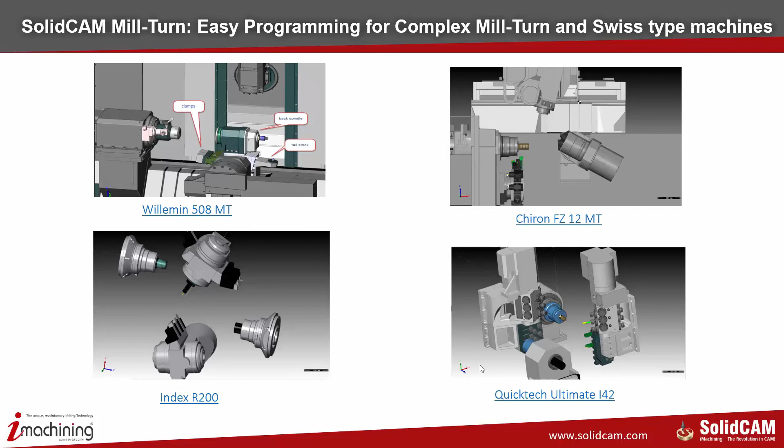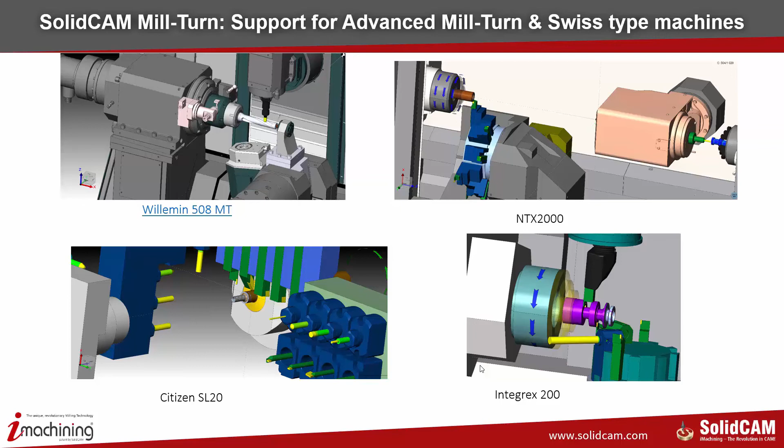So a few examples of different Swiss style machines that we support inside SolidCAM. Again, this is not all of them, we support any number of configurations. You can see a few more there as well, and some of the programming that's been done inside SolidCAM on these machines. So let's have a look at a little demonstration inside the software of how this works.

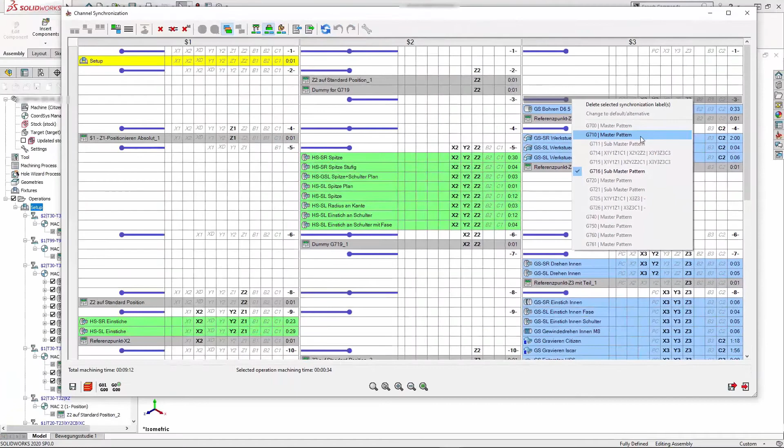So this is a component we've got here being machined on a Citizen style post processor. If we go to the channel synchronization here, this is the window. You can see on this machine we've got 3 channels. We also support the different axis patterns that this machine may have, so we can switch the different axis patterns on the synchronization markers.

If we have a look at the machine simulation, you can see we can simulate all the axes moving. We've got the main spindle and the back spindle both simultaneously working and synchronized here on the left and right hand side. We can see it live there. So this was cut as an example. We've got the turning on there. We come back to machine simulation. We can see full simultaneous milling on our component as well there.

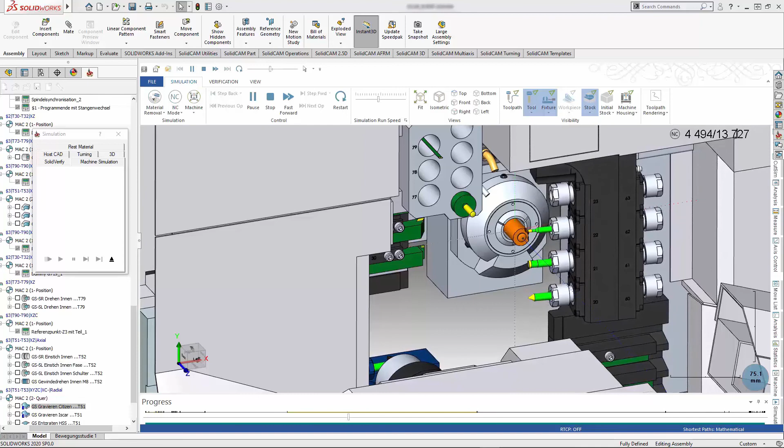So you can see we've got a B-axis on this machine with a bank of tools, and we can fully support indexial positioning with that B-axis, or we can support simultaneous work. You can see it in action there live on the machine. We have that simultaneous surface machining being done on that component.

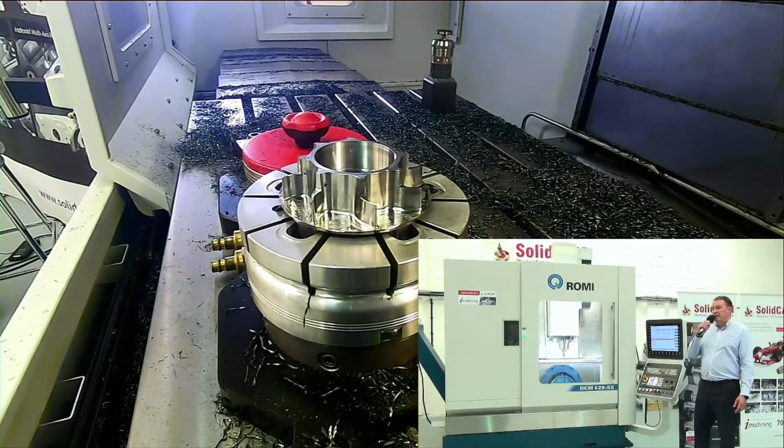Thanks very much for that, Ben. Great presentation on what can be quite complicated machines. For those of you who think it's Groundhog Day seeing Tim twice, slight technical glitch, so just proves that we're live. Anyway, we're going to carry on.

What Ben's going to do now is take the part out of the machine, and he will hold it up to the camera for us, so you can get a bit of a look at the engraving that he's done. And there you can see the logo in the middle. Very nice part, well done.

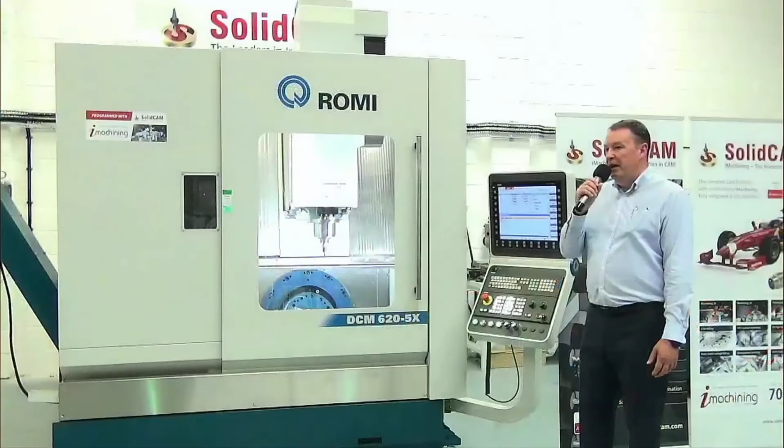So we're going to wrap things up now. We're just going to have a quick chat about this new machine that we've got, the 5-axis. So Ben, if you'd just like to talk through this new. Yeah, so as you can see, we've got the 5-axis machining like we spoke about earlier. This came in on Monday, so it's pretty new to us, but we're going to do our next seminar on this machine. It's a full 5-axis simultaneous.